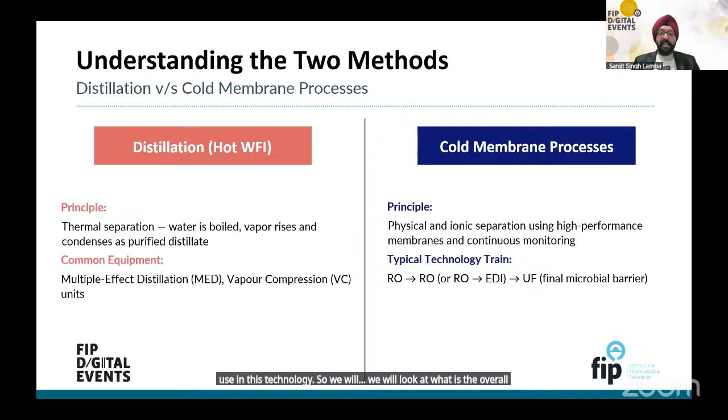So we will look at the overall sequential scheme for manufacturing membrane-based water systems. But typically, the distillation process is hot, so your distribution system is also hot, mostly. And I would say it automatically gets self-sanitized over a period of time because we know hot water systems are self-sanitizing, though it also requires periodic sanitization at a frequency set as per organizational needs.

But if you look at the cold membrane process, what we do is feed potable water, or water fit for drinking purposes, as the in-feed for this water system. It filters through reverse osmosis for bulk ion removal, followed by a second RO or a combination of RO plus EDI system, which is electrodeionization process, for the polishing.

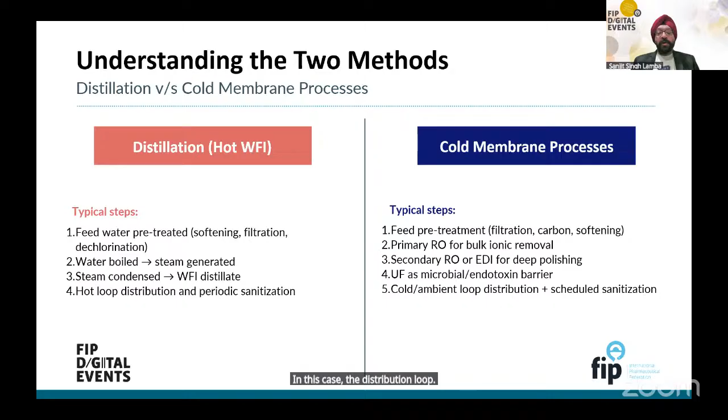And the third major filtration process in this is ultrafiltration, which acts as a microbial and endotoxin barrier for manufacturing water for injection. In this case, the distribution loop remains a cold loop and requires a scheduled sanitization process.

So if you look at the overall process architecture, we have the feed water, meaning water fit for drinking purposes. We do a pre-treatment of this water, which removes hardness, chlorine, and particulates, and also protects our reverse osmosis filters. It's important that we have a combination of reverse osmosis filters. Sometimes reverse osmosis plus nanofiltration is also used in this process, depending on the quality of the feed water in the region.

When you look at the first stage RO, the prime purpose is to reduce dissolved ions, organics, and particulates, whereas the secondary purification, either second pass reverse osmosis membrane combined with nanofiltration, does a very deep ionic and organic reduction, followed by a continuous electrodeionization process. In some cases, organizations also use mixed bed ion exchange, but primarily CEDI systems have replaced, in most cases, the mixed bed ion exchange systems. So after the electrodeionization process, we achieve very low conductivity and high purity water.

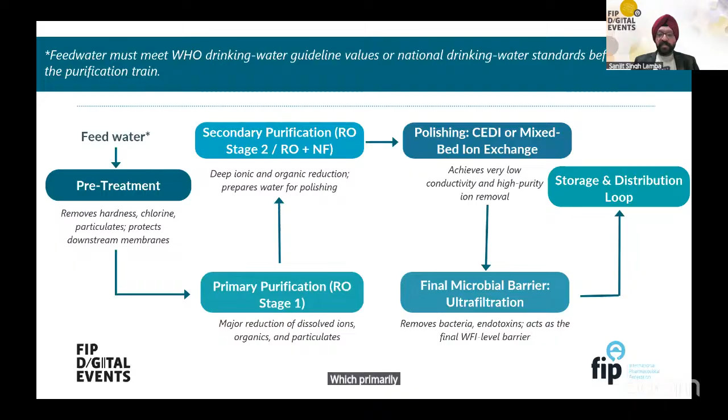And then after this generation system, we enter into the storage and distribution loop, which primarily is a cold system as compared to the hot system we see in the distillation process. There is a history and evolution of the system over the years. We will look at this over a period of time, but let's see what makes it a very preferable system.

One of the very important areas is it's very cost effective, and the capital expenditure for installation and commissioning of a membrane-based system is not only effective but affordable. It eliminates the need for heating, and because of lower capex and lower operational expenses, many companies are able to make it a very affordable and sustainable solution for manufacturing water for injection.

As I said, we use a combination of filters: reverse osmosis plus electrodeionization and ultrafiltration process. There is no heating up in the systems. This system is also very simplified because there is no requirement of any insulated hot loops or steam jackets. So we are maintaining a cold loop in this case. There is also reduced heating, ventilation, and air conditioning load.

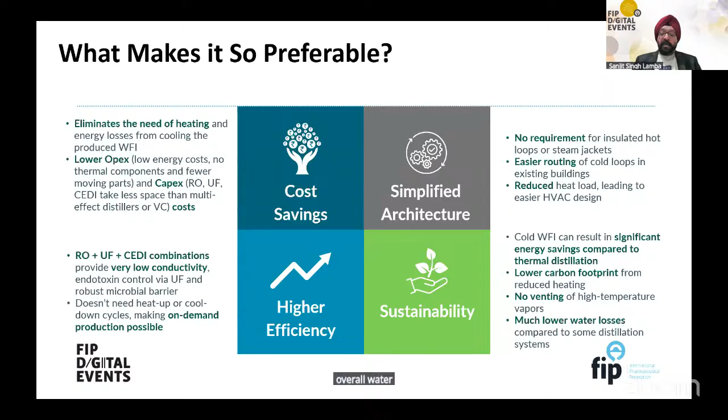And that also adds to the savings as far as power consumption is concerned. The sustainability of this system also makes it very attractive, looking at significant energy savings compared to thermal distillation, because there is a lower carbon footprint from reduced heating. No venting of high temperature vapors is required, and overall water losses are very low compared to the distillation process.

Of course, we need to be cautious while using membrane-based water for injection, because one of the risks involved in cold systems is the microbial risk. As I said, cold systems are not self-sanitizing, unlike water for injection manufactured by a distillation process. So there is a high risk of biofilm formation, which requires very regular monitoring, like total organic carbon, conductivity levels, bioburden, and sanitization frequency has to be established so that we don't have undue risk in the system.

Overall, because the system is cold, it's very important from the design perspective that there are no dead legs in the system, because these dead legs are reasons for microbial proliferation in the system. There should be smooth internal surfaces, including proper slopes, so that water drainage is assured, and there are correct point of use valve selections.

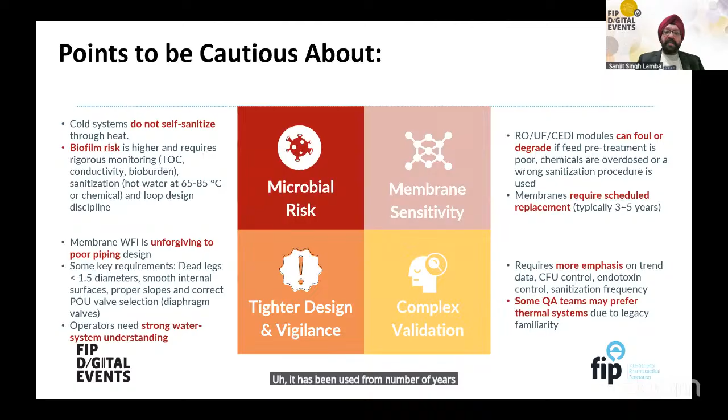But generally what has been seen in the industry is most people, especially the quality assurance teams and also from the manufacturing perspective, prefer thermal systems because it has been used for a number of years. That's a legacy which we are carrying from many years.

So let's look at some areas of comparison between hot WFI and cold systems. If we look at energy efficiency, hot water systems in general, for a plant of 5,000 liter capacity per hour, operating 20 hours a day, consume 2 to 6 kilowatt hours per meter cube of electrical power, plus there are other requirements including uninterrupted power systems.

On the other hand, the cold systems use around 1 to 4 kilowatt hours per meter cube, which includes pushing the water through reverse osmosis filters, plus ultrafiltration, plus electrodeionization systems.

On energy intensity, if you look at thermal technologies, they use a very large thermal duty for the boiler of 8 to 24 kilowatt hours per meter cube, whereas there is a minimal requirement for cold WFI membrane-based systems.

One of the very important criteria is the boiler. The boiler steam, used as an in-feed for the system, consumes more than 3 million kilograms of pure steam for a hot water for injection system, and it's almost nil for a cold membrane-based system. I think this is one of the very large differentiating factors.

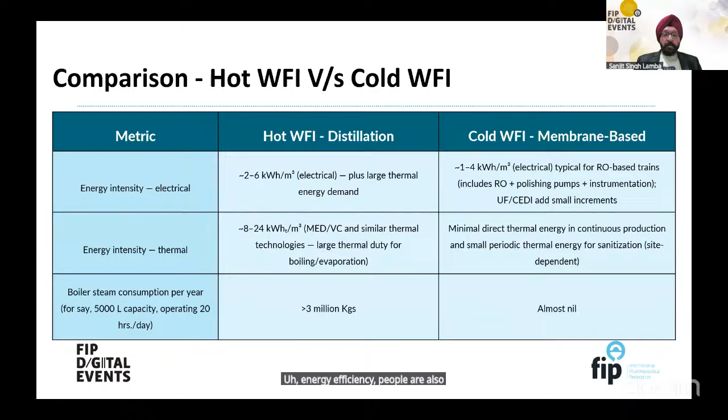In many regions, the generation of steam is becoming more and more expensive because of expensive fuel, and that's one of the reasons that, not only from energy efficiency, people are also looking at other options.

Overall, if you look at power consumption per year for a 5 KL capacity WFI system, it consumes more than 0.7 million kilowatt hours, whereas a cold system is less than 0.1 million kilowatt hours.

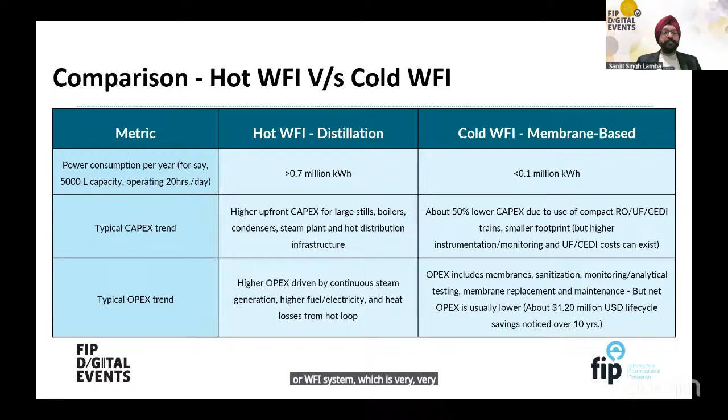If we look across geographies, the US and Japan were the first territories to adopt cold WFI membrane-based systems many years back. I would show you a separate slide for that.

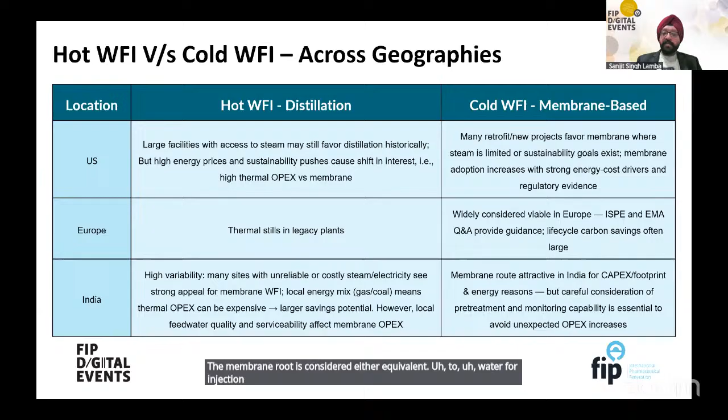Europe was a little late in accepting membrane-based water systems, which happened in 2017, where a number of organizations presented very successful data for manufacturing effective and energy efficient water for injection systems. Recently, in the revised good manufacturing practices in India and also by the World Health Organization, the membrane route is considered either equivalent to water for injection systems, or in some cases even better.

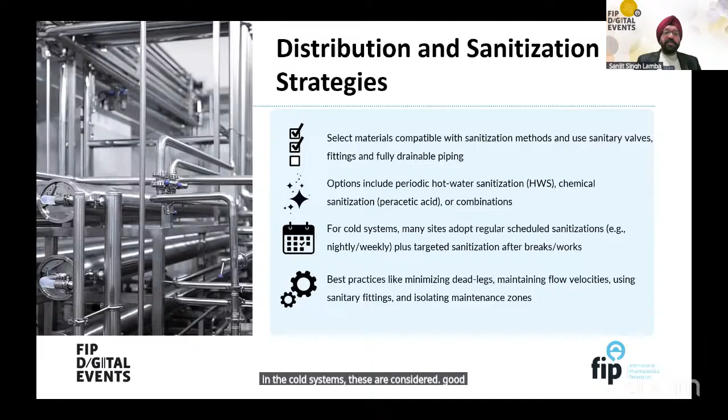Typically, any water for injection system undergoes design qualification, installation, operational, and performance qualification, in line with regulatory expectations and best practices. One concern I shared earlier is it's very important to look at your sanitization strategy and how you're controlling microbial levels and endotoxins.

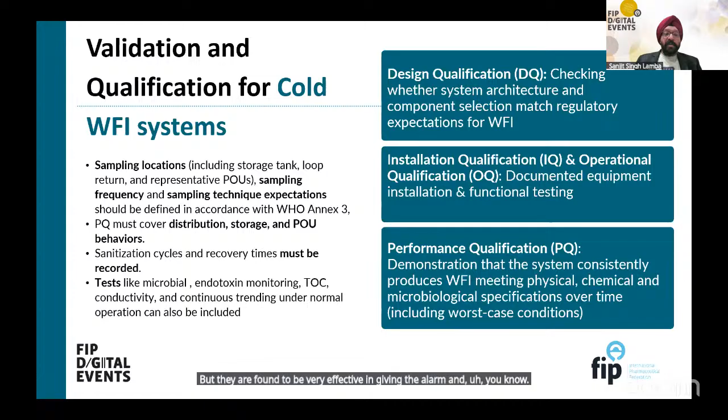Most organizations in the last couple of years or more have started using online monitoring systems for total organic carbon, microbial excursions, and conductivity, maintaining a continuous trend. Rapid microbial monitoring systems are newer but are found to be very effective in giving alarms and a control strategy for cold systems. Operator training and process ownership are most important for cold systems because they are riskier compared to thermal or hot distillation processes.

When you look at the monitoring plan, this is very interesting. Many organizations and technology partners have integrated online sensors for total organic carbon and conductivity, which is also used for purified water systems. But additionally, for water for injection, rapid microbial monitoring is very helpful in understanding whether the system is going through excursions.

And if there are excursions, how do we develop our sanitization and cleaning frequency based on that? From the maintenance perspective, one area to consider is making sure you always have backup membranes available - the reverse osmosis membranes and the ultrafiltration membranes - along with good sanitization and rapid response capability in case there are excursions seen online.

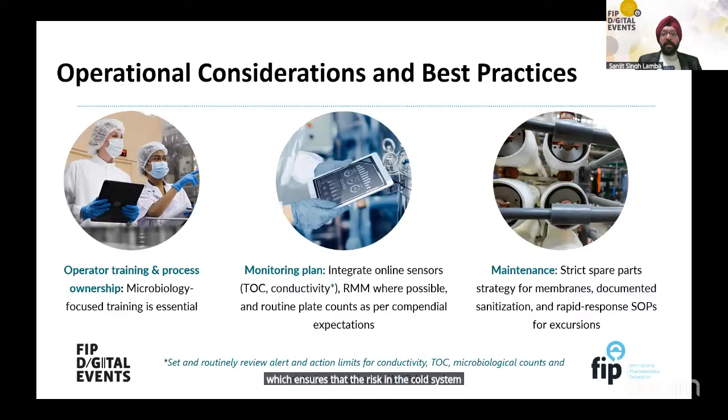As I said, we have already been using online TOC monitoring for purified water and water for injection for many years, and a good online TOC system gives you good trending and helps with continuous process verification. It also allows for detection of membrane fouling signs.

And that's, I think, very important for an engineer or an in-process quality assurance person to really look at how membrane fouling starts, looking at parameters like TOC and conductivity, and then you can plan maintenance for both the RO, EDI systems, and also the ultrafiltration.

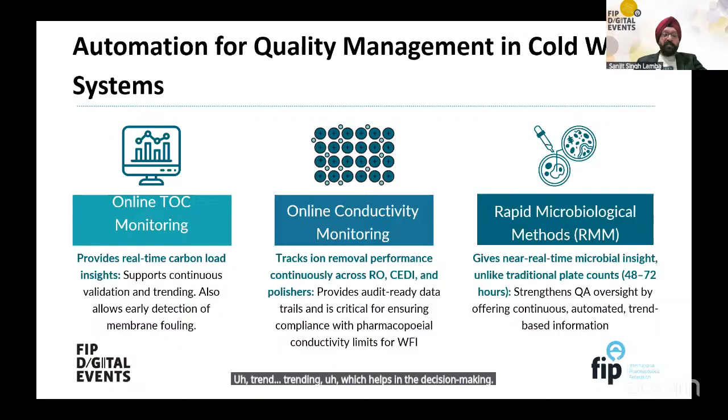As I was saying, rapid microbiological methods give insights into what's actually happening in the system compared to a traditional plate count method, which you can only see after 48 or 72 hours. But the RMM method, which is online - and I find this very interesting - gives good oversight to the quality assurance team by offering continuous trending, which helps in decision-making for maintenance and sanitization.

One of the very important areas per WHO Annex 3 is to conduct a risk assessment for water for injection systems. This has also been recommended by regulatory agencies and many good practice guides, including ISPE, to look at your risk assessment.

What kind of product do you have in perspective? What's going to be the finished product here? Is it an ophthalmic product? Is it an intravenous product? Is it a large volume parenteral? Is it water used in medical devices and other areas?

Based on that, you need to conduct a detailed risk assessment, identify the risks across the whole life cycle of your water use, and drive risk-based validation, because cold water systems require more detailed validation and qualification, including online computerized controls, to make sure risk is minimal.

We look at our procedural controls to continuously maintain these water systems. And as I said, special attention should be paid to the user requirement specifications, and what is the feed water quality?

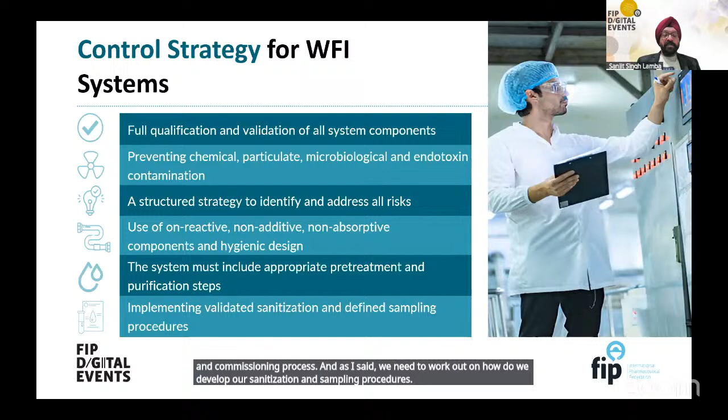Very good quality of valves, piping, the quality of welding, the quality of the finishes in the stainless steel pipes, which generally are stainless steel 316L grade, used for such systems. It is very important that the polishing is assured, and we prevent any contamination during installation and commissioning process. We need to work out how we develop our sanitization and sampling procedures, looking at the risk which is higher in case of cold membrane-based systems.

So overall, if we look at the strategy for this, it includes the design perspective: the way your in-feed water, your pre-treatment system, the kind of membranes you are using, the kind of monitoring system you are using, assures a holistic approach in looking at a water for injection system. We must look at the contact materials and surfaces, especially the polishing of the stainless steel piping, which is very essential.

Because if it is not polished, it attracts more biofilm formation. And as I said, the design, especially from the water velocity perspective, is considered a very important criteria of a good water for injection system.

So from the quality management system point of view, we need to have good in-process checks and monitoring, including sampling by quality control, to assure that the water system complies to the requirements. Maintenance and calibration by engineering and continuous oversight by quality assurance is a very important parameter. We generally leave the systems to engineering over a period of time.

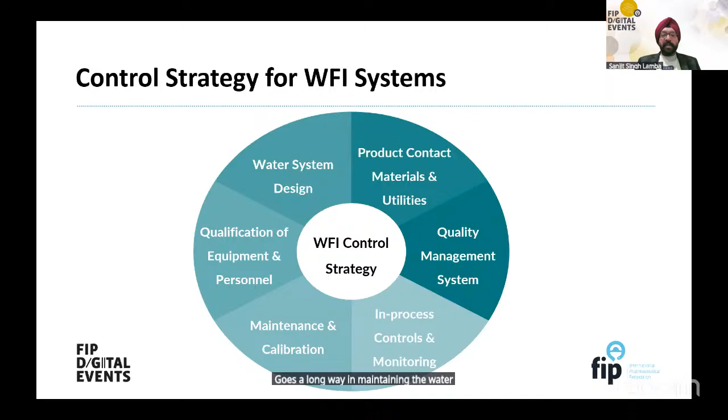And sometimes overlook the areas of continuous monitoring of these systems. We have seen over a period of time that continuous verification and qualification of equipment, and continuous training of people, goes a long way in maintaining the water for injection systems run by the membrane filtration process.

If we look at some good practices for cold WFI systems, it is aligned with WHO Annex 3 and also the ISPE good practice guide, which I mentioned earlier. We start with qualified feed water and maintain system validation to ensure we feed only WHO drinking water or potable water as per the national standards of the country, to ensure the entire WFI system remains in a qualified and validated state.

From the contamination control strategy for water, we need to implement hygienic design to prevent chemical, particulate, microbial, and endotoxin contamination. Special consideration should be given to sanitary fabrication, elimination of dead legs, and polishing of the stainless steel piping. From proven technologies, technology has advanced over a period of time using various combinations.

Including a single reverse osmosis, or a combination of reverse osmosis and nanofiltration, electrodeionization systems, or ultrafiltration process, which also goes through UV and softeners in the pretreatment system, supported by good control over microbial, chemical, and endotoxin contamination.

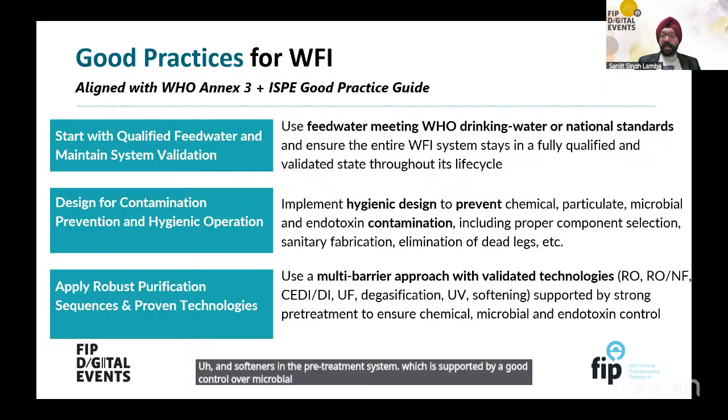We need to establish a comprehensive control strategy, as we discussed, including the storage of water, the distribution loop, the documentation system, detailed validation, sanitization process, and also assure flow or velocity control to prevent biofilm formation.

This is the most important point: prevention of biofilm formation in cold membrane systems, because, as I said, it is not a self-sanitizing system. So appropriate recirculation and prevention against any kind of stagnation in the system assures better control over microbiological and endotoxin requirements.

The control strategy and good practices also include continuously monitoring TOC, conductivity, water pressure, and velocity, and microbiological indicators. You have to develop your alert and action limits and do continuous trending to detect early deterioration, which may happen due to chemical issues or, mostly, microbiological proliferation or biofilm formation. The validation and sanitization process has to be designed very thoroughly.

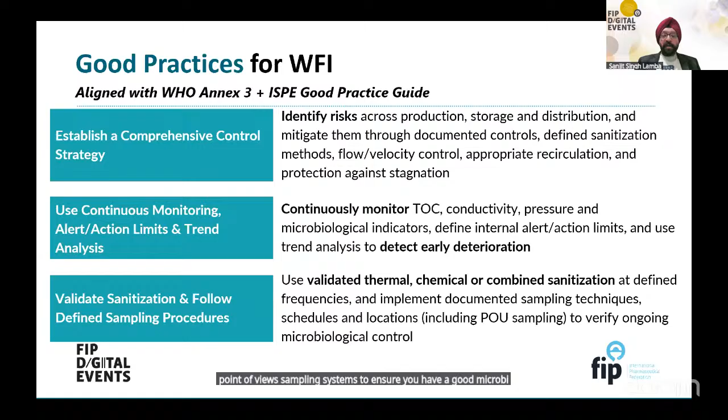So chemical sanitization, as I was saying, should be used with caution, not overused over a period, because it would damage the membranes over a longer period. And you have to select really good point-of-use sampling systems to ensure good microbiological control and prevent any kind of false positives in the system.

An implementation map generally considers what we discussed with feasibility first, including your feed water requirement, the kind of design, user requirements, specifications, and assessments including vendors and engineering firms, using your URS and design philosophy for overall cost of ownership, and looking at commissioning, training of people, and other validation requirements.

As I was saying earlier, over the last many years when we started using high temperature distillation during the 50s to 60s, primarily it was only the US and Japan which accepted membrane-based water systems for making water for injection. But it took a number of years for the European industry and regulators to accept. Finally, in 2017, it was accepted as a procedure for manufacturing cold WFI systems.

In between, during the 90s, there was a monograph of high purity water in the European Pharmacopoeia. But as of today, the EMEA accepts membrane technology for production of WFI, and it has been increasingly used in biopharma companies in Europe. I've also seen new plant setups in the Southeast Asian market, apart from the US, which has been in use for many years.

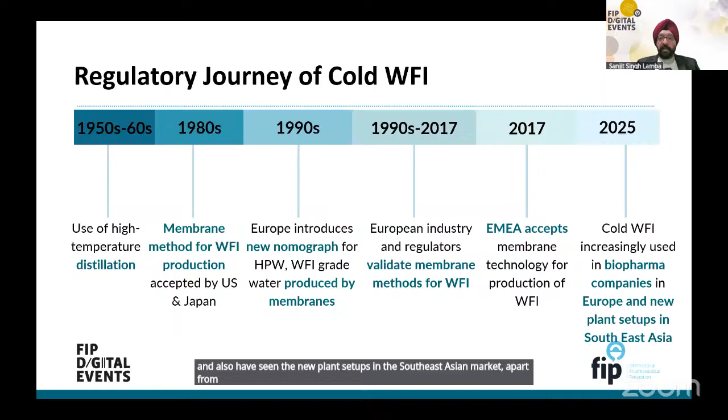From the regulatory perspective, there are various guidelines and good practice guides from the World Health Organization, as I mentioned, Annex 3 for Technical Report Series 1025. It talks about production of water for injection by methods other than distillation. US FDA and USP, especially 1231, talk about distillation or a purification process, a method equivalent or superior to distillation in removal of chemicals and microbes.

Same is the case with the European Union. It accepts water for injection monograph 0169, also acceptable by PIC/S. If we look at the utilities guidance document under 6.10, page 17, it talks about water for injection systems produced equivalently by a combination of distillation, or also reverse osmosis coupled with other techniques like electrodeionization, ultrafiltration, and nanofiltration. ISPE in 2001 came out with this guideline, talking about distillation and other purification processes.

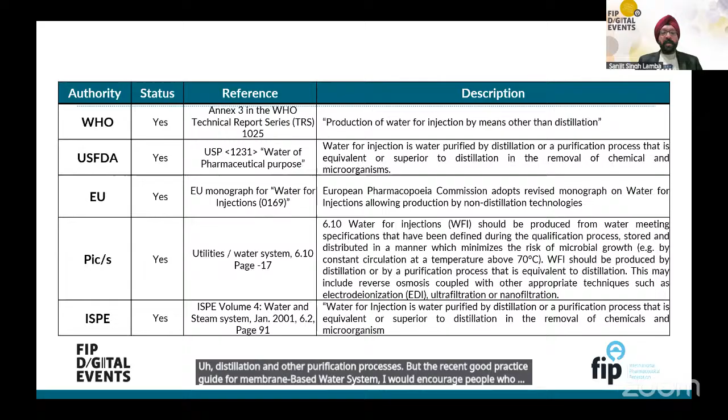But the recent good practice guide for membrane-based water systems - I would encourage people who want to know more about that to use that guide for their own enrichment.

If you look at the USP monograph, there are limits for total organic carbon, conductivity, endotoxin, pH, and bioburden. Generally, from the generation point of view, you see the limits on the top line.

If you look at TOC, a normally good cold water for injection generation system delivers around 20 total organic carbon at the generation stage, 0.1 microsiemens conductivity as compared to a limit of 1.3, and endotoxin of 0.06 compared to a limit of 0.25 endotoxin units per ml. From the bioburden and pH perspective, it is the same as we use for thermal distillation-based systems.

Even if we look at the critical parameters of a water for injection system, parameters like endotoxin have a safety factor of 4, conductivity has a safety factor of 13, and total organic carbon has a safety factor of 25, which goes in favor of a cold membrane-based water for injection system.

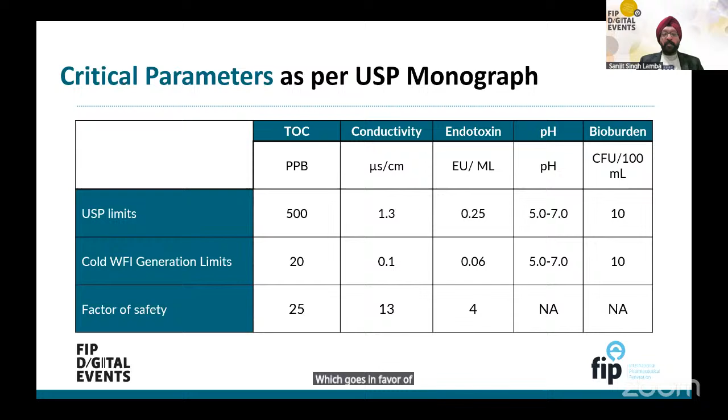This is just an overview, and anyone who wants to understand more should look at the ISPE good practice guide and other guides and regulations, including the WHO and PIC/S guidelines, which talk about this in more detail. I would really encourage interested people to look at this - there are a number of references available today.

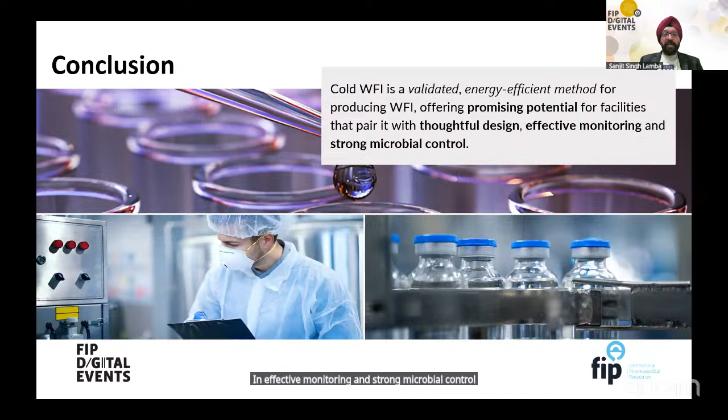So overall, I would say cold water for injection is a validated, energy efficient method for producing water for injection. It offers great potential for facilities, but we need to consider thoughtful design, effective monitoring, and strong microbial control to ensure the system is a truly sustainable process. Thank you very much.